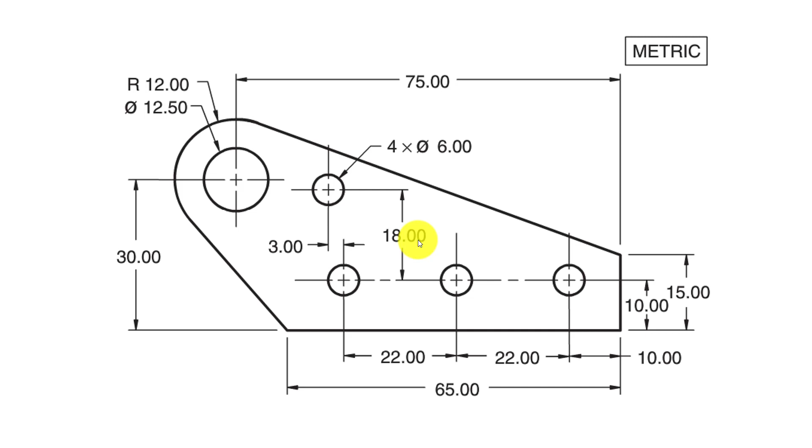Okay, so I'm going to go ahead and begin making this part. You have the copy of this part on the handout that was given in class, so I'm not going to keep it visible on the screen. Okay, so we're going to create a new part. By default, our part template is in the inch/pound/second unit system, so we're going to come down here to the lower right-hand corner, click on where it says inch/pound/second, and switch to millimeter gram second.

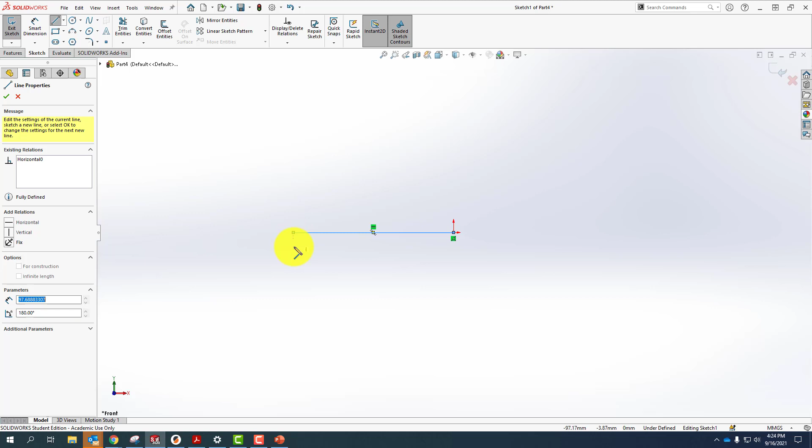I'm going to left click on the front plane, and I'm going to create a sketch. Now I'm going to go to the line tool and I'm going to start my part here. Now I'm going to click and drag and put in my first dimension. So I'm going to right click here, grab the Smart Dimension tool, and we'll put this in as 65 millimeters. The reason I'm doing that is because I'm going to create the next 3 lines all in one sequence, and I want those lines in proportion to the rest of the part.

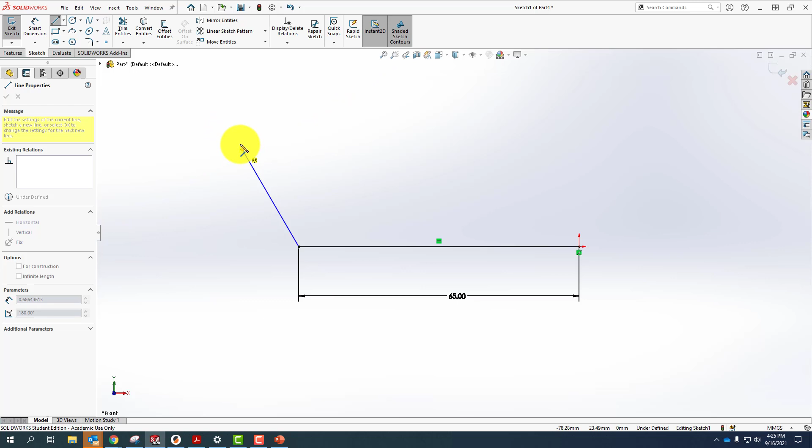So I'm going to right click here, go to Sketch Entities, and select the line. Now we're going to make sure we get our coincidence point there. I'm going to come out, draw the line, and now click, and I'm going to come out, and I'm coming back till I get back to that point, and that generates a curve. And then I'm going to drop the point, and I'll come out here until I get right above the origin, and I'll come down and finish at the origin.

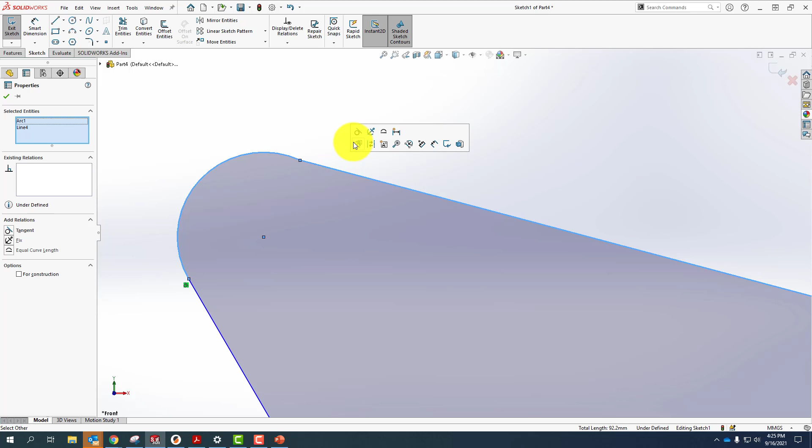So as long as we had this dimension set, all the other parts of this sketch are going to be in proportion to each other. So when I change some dimensions, I know I'm not going to create some spaghetti. All right, so the first thing I note is that I do have my tangent line here, but I don't have the tangency over here. So I'm going to select this curve, hold down my control key, select this curve, and from the flyout menu, I'm going to select tangent.

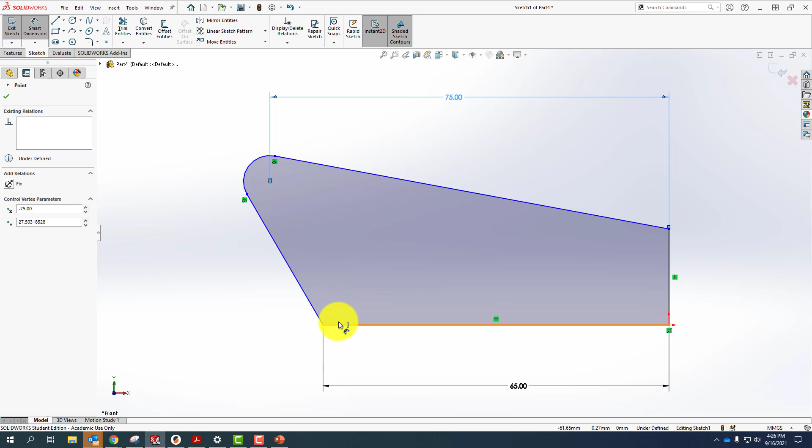All right, so now let's put on the 2 main dimensions that locate this point. Go to the Smart Dimension tool, select here and the point, and I'll drop it up there and make that 75. I'm still in the dimensioning tool, so I'll select here and this line, and I'll make that 30, and I'll dimension this radius. Now note that since I drew it as a curve, it doesn't come out as a diameter. You'll see where it says R6.2, and we're going to change that to a radius of 12.

Now I'm going to get out of that tool, and we note that this line now is still blue. So if I try dragging it, nothing happens. If I try dragging this circle, now you see what's not fully defined. So you come over here and you recognize, of course, that we have to put in this 15 millimeter dimension, but it's easy to forget things like that, especially when your part looks the way it looks on the sheet.

So I'll go back to my dimension, grab it over here from the right menu, select, left click to drop, and make it 15 millimeters. I'll come up here to my circle tool, add my circle in, and that dimension is going to be 12.5.

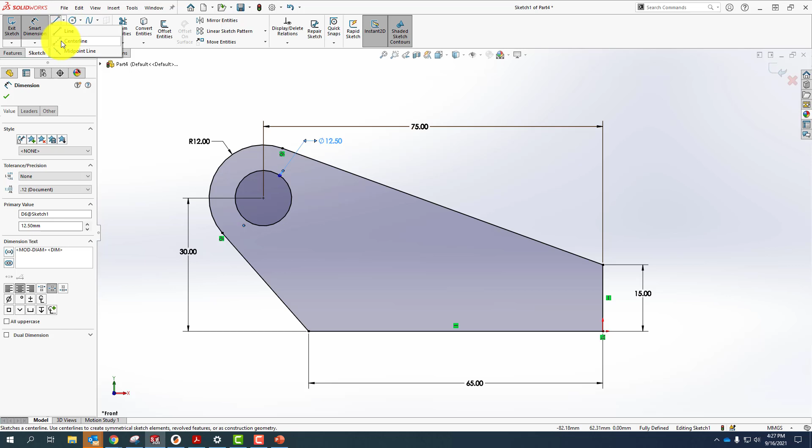So now I have to put in my 4 circles. So I'm going to come up here and select my center line tool. Now I'm going to zoom in a little because I want to make sure I don't accidentally grab the center point, right? Because the distance is going to be 10 millimeters from the bottom. So I'll select here, and then I'm going to go all the way over to the other side, and I'm going to make sure that I have a coincident here.

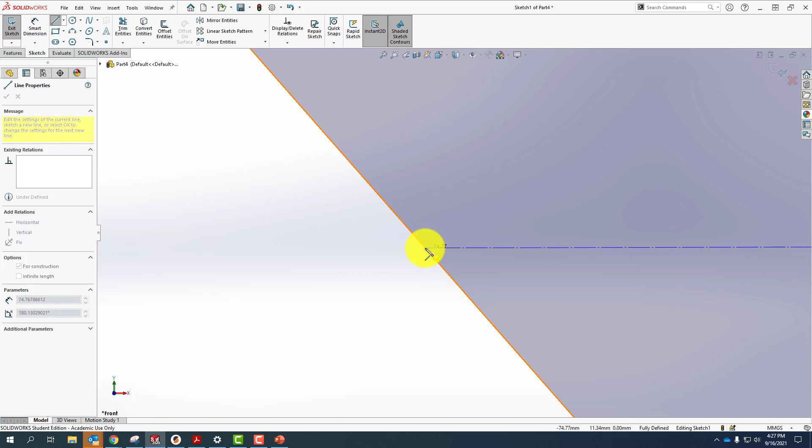And again, be really careful. You don't want to get this center point here because that would make your line not horizontal. Go up a little bit taller, and there is where the line is horizontal. So that would be an easy mistake to make. Come over here with my Smart Dimension tool, make that 10 millimeters, and

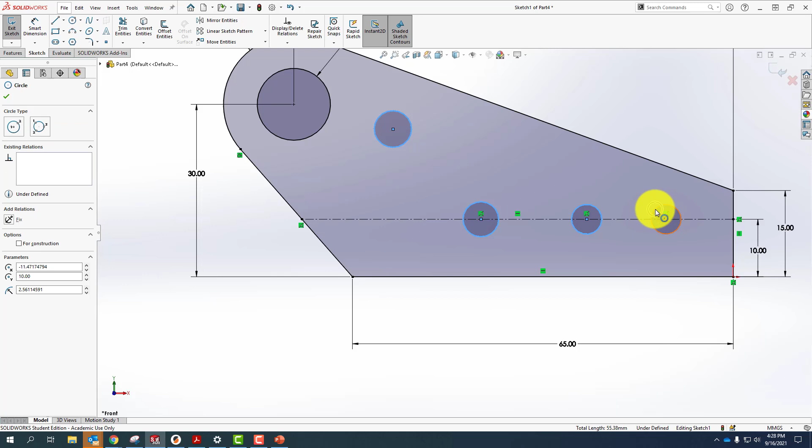grab my circle tool, and I will just put in 3 circles. Again, making sure I don't accidentally click on the center line. Put another circle here, and I'll just drop the 4th circle somewhere in its approximate location. I'm going to hit the escape key. Now I'm going to hold the control key down. This one's already selected, so I'll select the other 3. Let go of the control key and select them to make them equal to each other.

Go to my Smart Dimension tool, select one of the circles. Its dimension should be 6 millimeters. So we'll put that in. I'm still in my dimensioning tool, so I'll select the edge of the circle and this line and make that dimension 10. Another way of dimensioning circles is selecting their center points. So I can make that 22. Or again, I can just grab the outside edges of the circles and we'll make that 22.

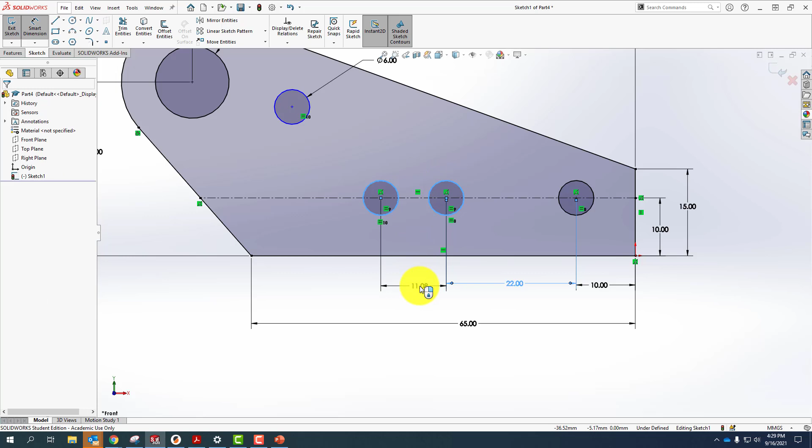I'm going to hit the escape key because I want to show you something about moving circles around. If I try to select the outer edge of the circle and try to drag it, it doesn't drag. The outer edge of the circle has a diameter of 6, so it doesn't want to move. If you want to move the circle around, you have to grab its center point.

So I'm just going to move it over here and right click, go to my Smart Dimension tool, select the circle and the circle and pull up or down, right? If it's grabbing like that, I can make sure I come down, right click to lock the dimension so that I get it where I want it to be. And this dimension should be 3 millimeters. And then from here down to the construction line should be 18 millimeters.

I'll hit escape to get out of any tool. We'll note on the bottom that my sketch is fully defined. So we have our finished part here. If I go to the sketch toolbar, the shaded sketch contours is on, so it knows that these are interior. Sometimes the term is referred to as islands. So since we have a main outer contour with inner contours defined, it'll extrude the outside area by default. I can ask SOLIDWORKS to change that if I want to, but for right now, we'll allow SOLIDWORKS to do what it thinks it's going to do.

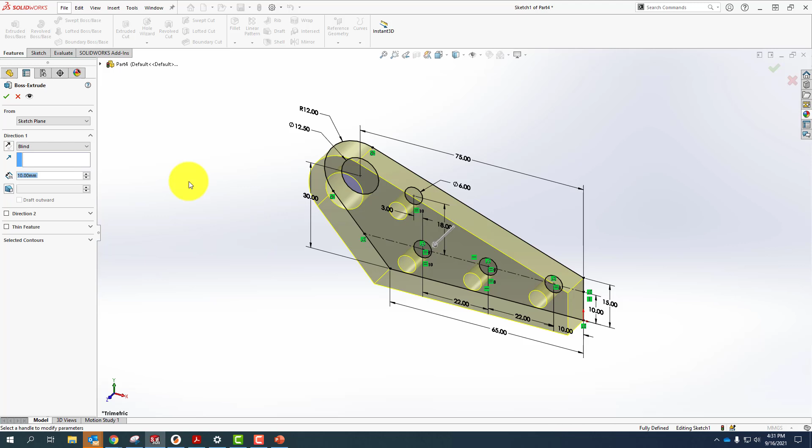So we'll go to Features, Extruded Boss. The default here does happen to be 10 millimeters. We note that all the holes are being extruded the way we're expecting them to be, and we'll say OK. We'll now go up to the Evaluate tab. We'll go to Mass Properties, and we will verify that the mass, or rather the volume, is 21,203.01 cubic millimeters. And now you're going to make some modifications and then enter into the location in Blackboard the value of the surface area.

So let me just take you back and show you how to do that. We're going to open up, right? Boss Extrude is here. The little arrow next to it, when we click on it, opens up the sketch because Boss Extrude 1 is based upon Sketch 1. Left click on Sketch 1, go up to Edit Sketch, and then we can go ahead and change the three values. I'm just going to change them to some random value, 75.

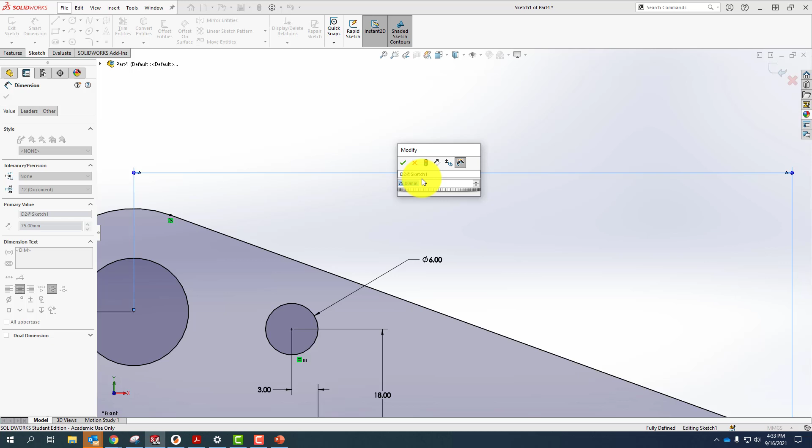All right, hold on, what did I just do there? Sometimes I'll forget to tell you. So I'm just going to come over to 75 and I'll double click on it. That opens up the modify box and I'll make this 80. I'll say OK, and it automatically updates. I can change this to 40, so that was a double click again, changing that dimension to 40, and I'll change this dimension to 55.

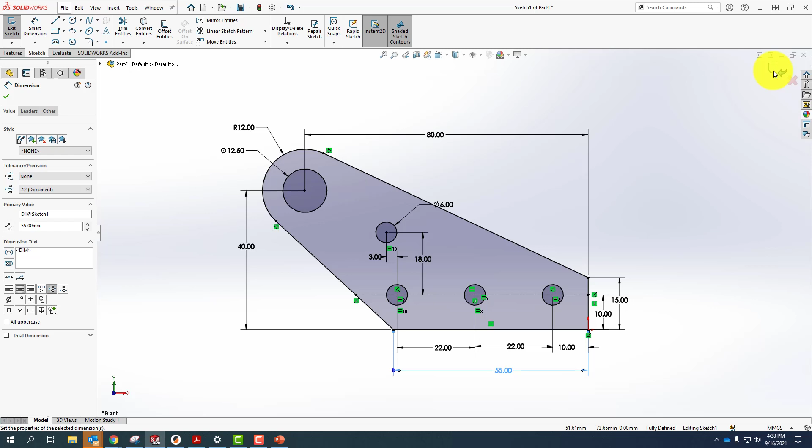So I've obviously changed my part, so I'll select over here to finish my sketch. Now this is one thing that's happening. When I say finish the sketch, SolidWorks will automatically finish the sketch and then do the next step in the feature manager tree, which is to build the extrude. So the sketch closes and the Boss Extrude 1 gets rebuilt. So now I can go ahead and go to my mass properties. I'll note that the volume has changed.

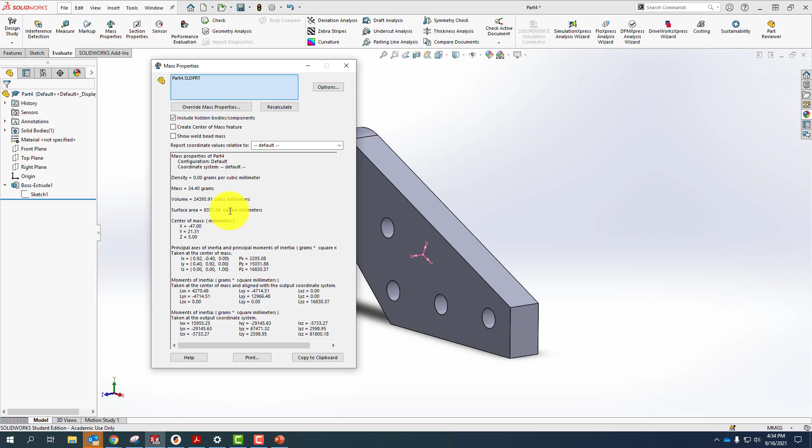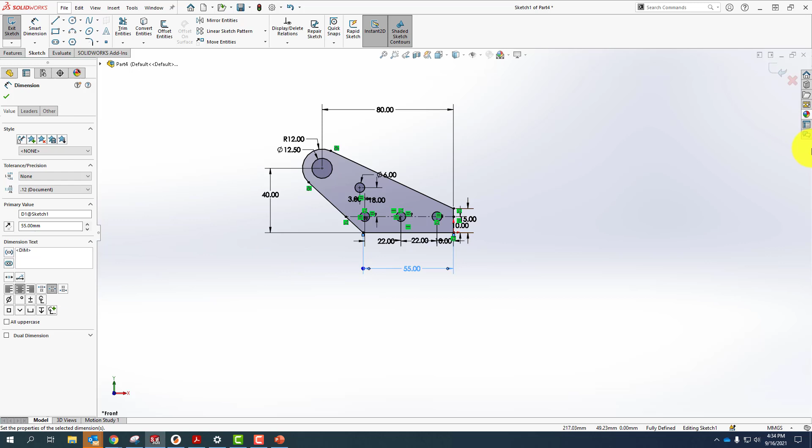If you're following along, your volume should now be 24,395.91 cubic millimeters. And in this case, the surface area is 8,351.54 square millimeters. So all you have to do to finish your homework is to go into your sketch, left click, edit the sketch, and change these values. I believe these are the A, B, and C dimensions, to the numbers that are listed in the Blackboard assignment. Close the sketch to rebuild everything and go back to your mass properties and enter the surface area.